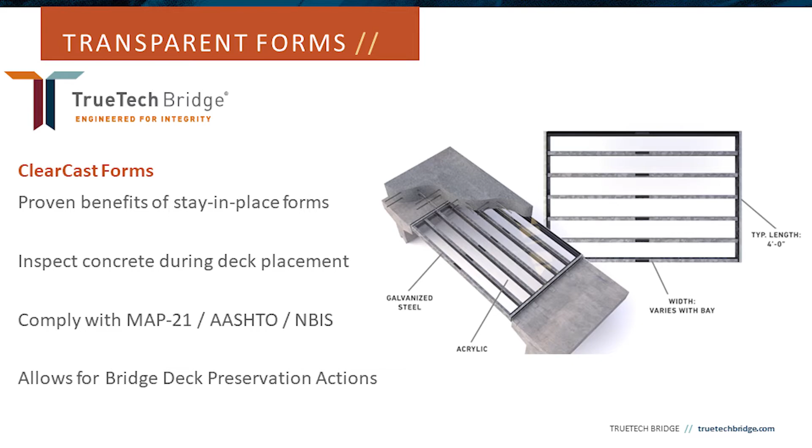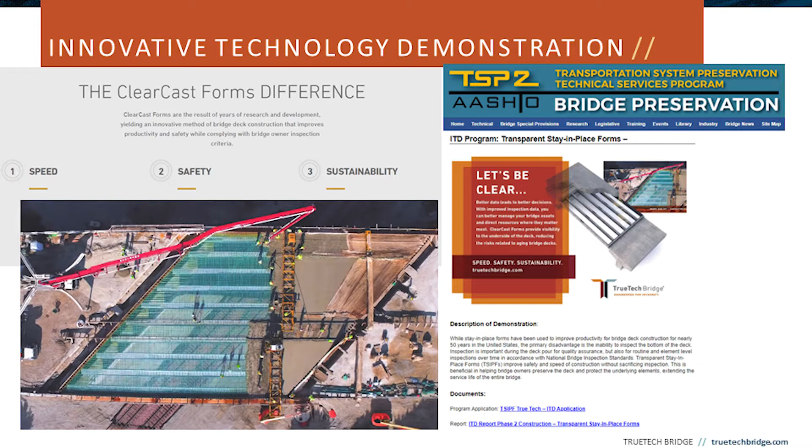And transparent forms were basically developed in response to 3 owner and contractor pain points. So they're always looking for a system that allows contractors to be more productive, to get their bridges built faster. Contractors and owners want a way to improve safety on their job sites. And they know that by reducing exposure to construction activities, they can be safer. Third, owners want to know the condition over time and then take the right action at the right time to preserve their bridge deck. So because of that, transparent forms were developed, and they've quickly gained traction across the United States because of those benefits.

So a little bit about our company, TrueTech Bridge. Contractors and bridge owners look to us to drastically save time, improve productivity, and then help them meet their bridge preservation goals. We're based out of Raleigh, North Carolina, and we're a design supply company of bridge products for the highway market. We currently supply 2 products. That's the ClearCast Forms, but also ClearCatch panels, which I'll review towards the end of the presentation.

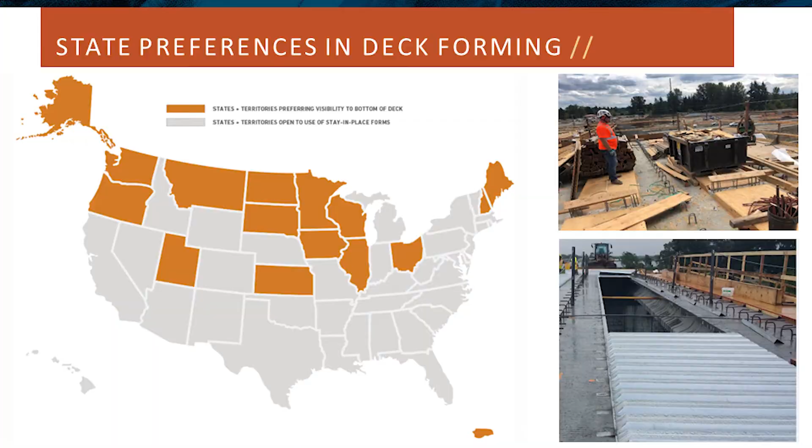So depending on where you're from, you probably know your state's stance on stay-in-place forms. Transparent forms meet a need for speed and safety in these orange states. Usually in those states, stay-in-place forms are prohibited. So we help contractors eliminate the time and risks involved in stripping forms over traffic, over railroads, other dangerous situations. In the gray states, transparent forms help improve preservation. And that's all through the ability to inspect the underside of the deck, helping those owners have more accurate condition ratings and the ability to make any small repairs before they become major risks.

So visibility is important because those routine inspections lead to the condition ratings. Following Glenn's presentation, that's important so they can take bridge preservation action and know the condition. The AASHTO National Bridge Deck Preservation Working Group states it pretty clearly in their resource guide, the importance of a bridge deck. It's like a roof that provides protection of those underlying elements from environmental conditions, which then correlates to extended service life of the entire bridge.

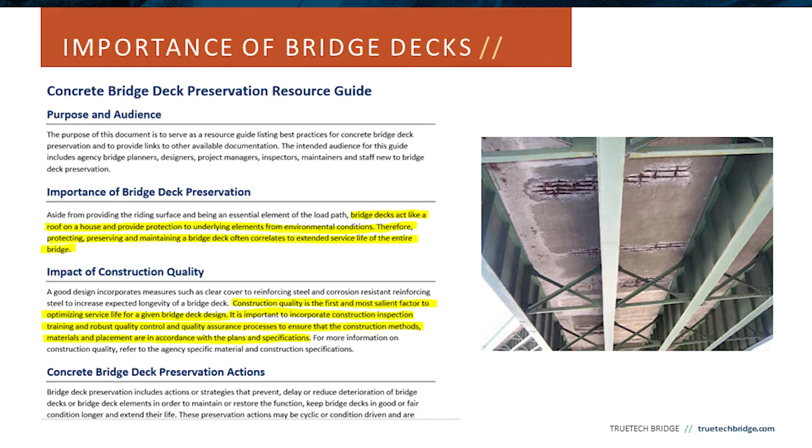They also go on to talk about the impact of construction quality, which they say is the first and most salient factor to optimizing service life for a given bridge deck design. So with stay-in-place metal, visibility to the underside of the deck is obstructed and cannot be inspected.

To take this a step further, once the deck overlay is done on the top of the deck, then neither surface of that deck can be seen, and this is something that has concerned inspectors and bridge owners across the country. So Indiana DOT had been using stay-in-place decking for over 40 years.

They'd recently been putting more of a focus on the value of inspections, and they're aware of some of the uncertainties they have in terms of the condition of their metal form bridge decks. Some within their department, I believe, wanted to prohibit stay-in-place forms going forward, but the construction group realized that there's some safety aspects of stripping forms over traffic and high heights, so they were looking for options.

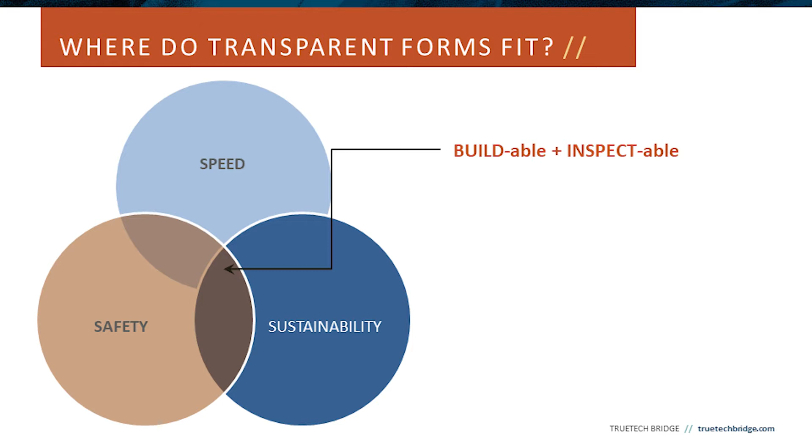And Indiana DOT is not alone. There's a lot of bridge owners that tell us they need a stay-in-place form that is both buildable and inspectable, so a form that meets the needs of the contractor and the owner.

So as Indiana was evaluating our transparent forms, around that time we were accepted into the ITD working group. So we partnered with INDOT's Jeremy Hunter as the sponsor and HNTB as a consultant to report on the use of transparent forms for a bridge deck in LaPorte, Indiana. So a few details of the project here.

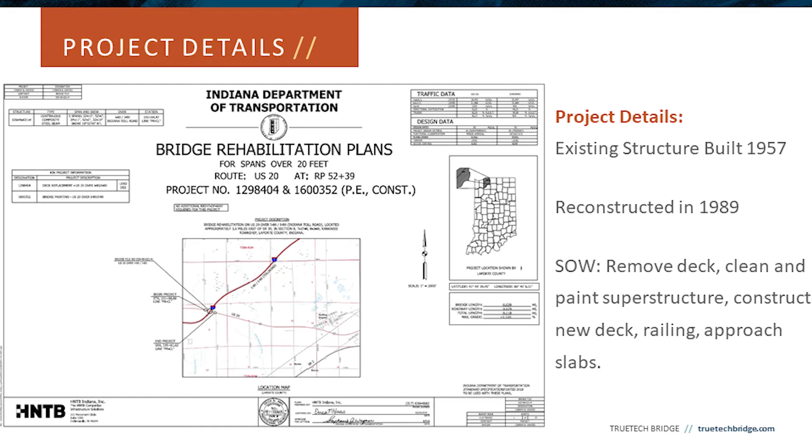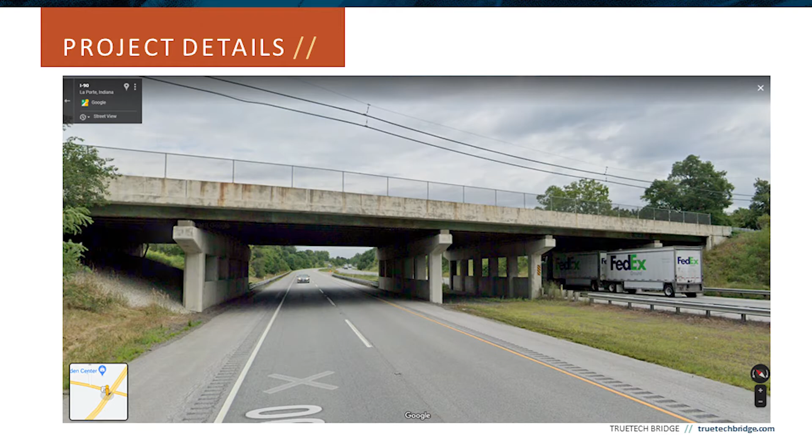The existing bridge was built in 1957. INDOT did a rehab in 1989, which was the first deck replacement. And then the project that we're working on was the second deck replacement just 31 years later. It's a 4-span continuous steel girder bridge. It's carrying US 20 over the Indiana Toll Road, which has about 28,000 vehicles per day.

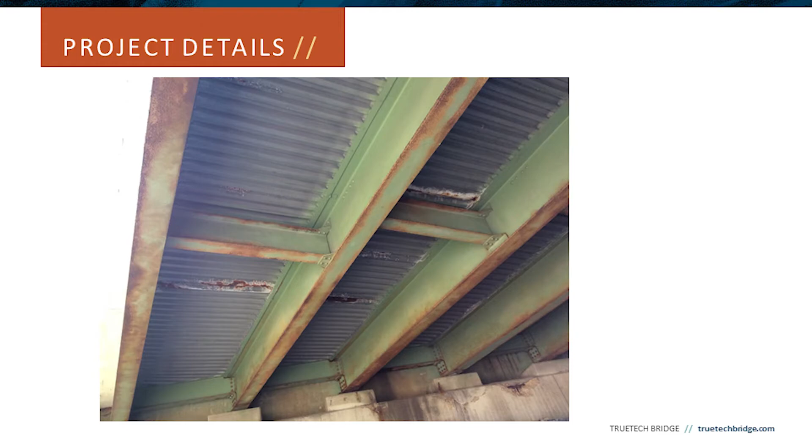So both the deck and the girders were showing signs of deterioration. You can see the rusting and the efflorescence of the metal pans here. And INDOT specified permanent transparent forms in the plans. The square footage of forms was around 14,000 square feet. Project bid back in 2019 for a low bid price of $2 million.

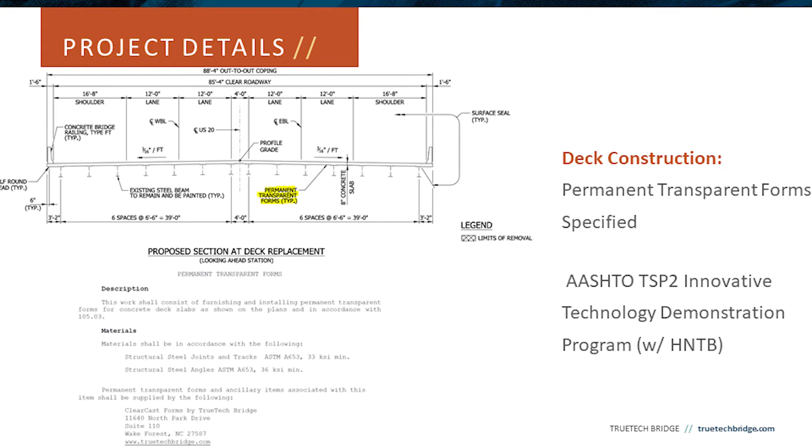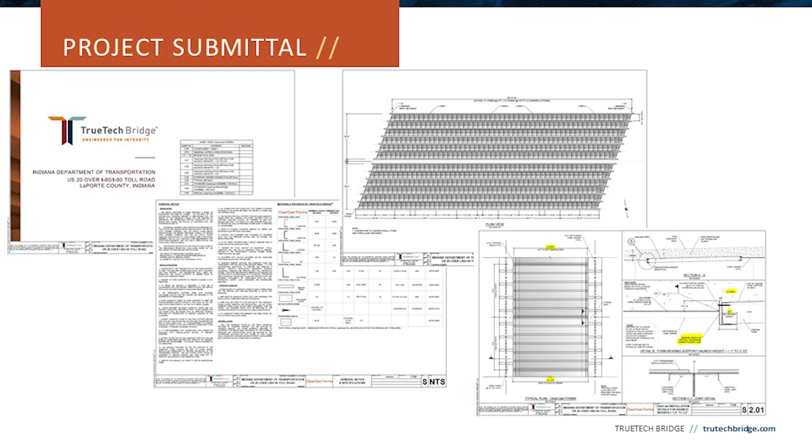So TrueTech Bridge, we provide both the design and the supply of this form system. We prepare all the shop drawings and calculations for every project, custom details for the contractor to do the installation properly. Just due to time constraints, I'm not going to go over those details, but just know that's one of the services we provide. So here's the installation of the first phase.

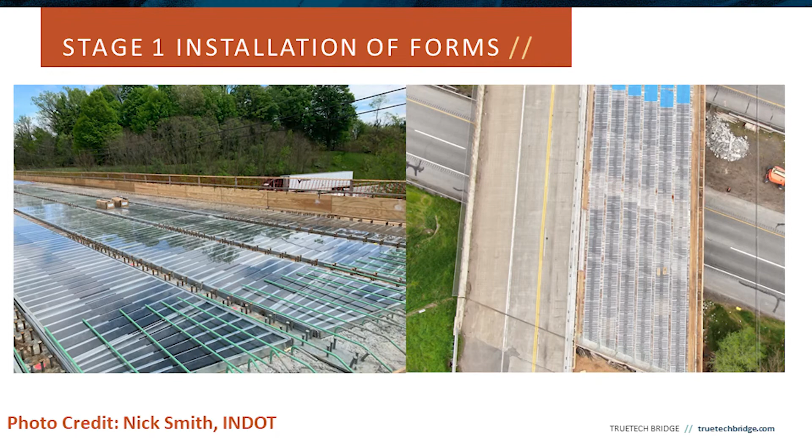This was a 2-phase project, and it went really well for it being the first time for this contractor in the state. Images here of the forms put in place just prior to rebar installation. And the welded support system is exactly the same as what's used for corrugated metal forms, so contractors are very familiar with that process. All the forms do come prefabricated and install very fast once those support components are in place. And you can see the skewed forms here at the abutments to match the existing bridge geometry.

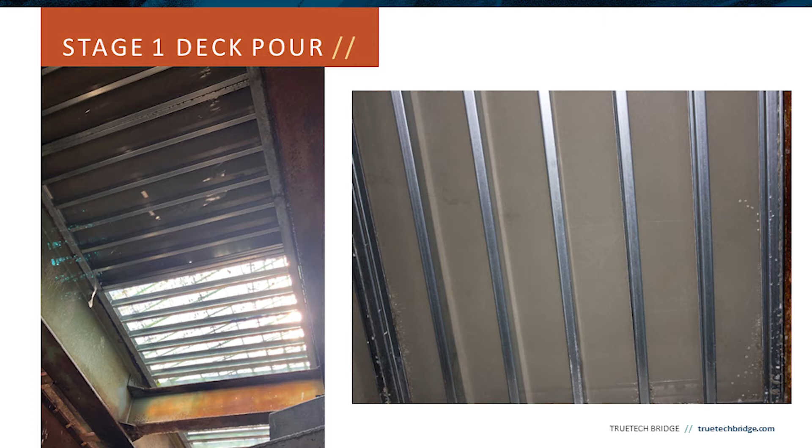So photos here during the deck pour below the deck. Owners tell us they like to see what's happening during the deck pour and confirm consolidation of the concrete, making sure they're getting what they're paying for.

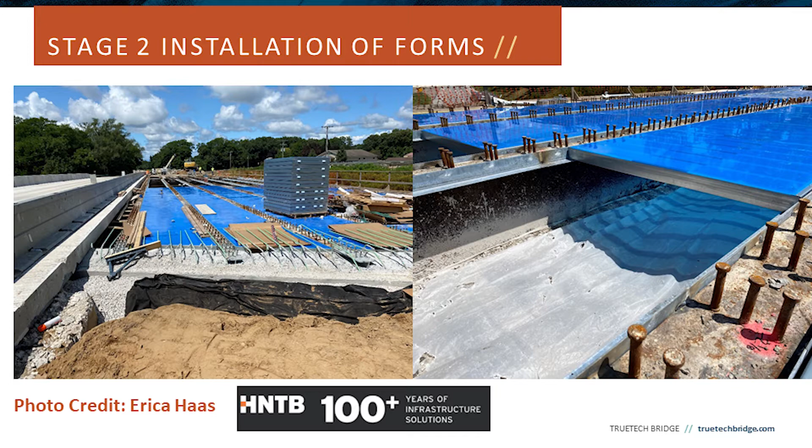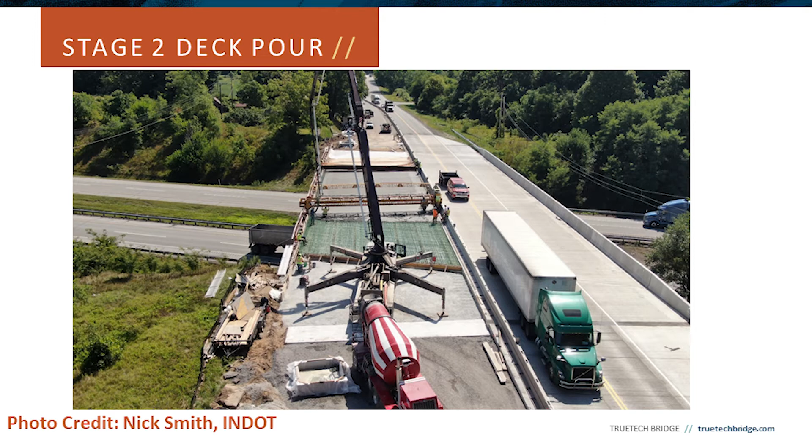Second stage installation here. You can see the pallet of forms sitting on the bridge. Each of these weigh about 65 pounds, which is easy for 2 people to pick up and handle and install them. The second stage went much faster than the first since they had a little bit of experience. See the second stage deck pour here, stage 1 on the right, stage 2 on the left.

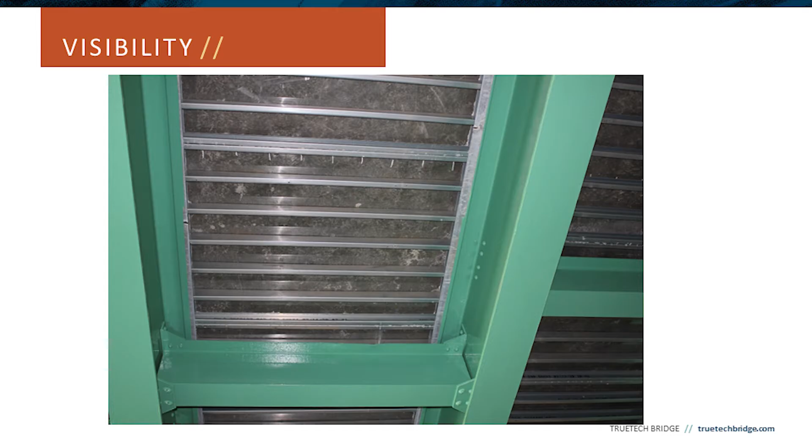And I think this photo is interesting. You can see where the rebar subcontractor marked these little white chalk lines on the forms just to show the spacing of that longitudinal reinforcing. So you can't see this on any other type of form system, and I think that could come in handy in the future to know where that rebar is located.

Photo at the stage line, so the deck on the left side of the girder was formed and stripped. The right side obviously has the transparent stay-in-place form, just for comparison. And then I've got some snippets here, might be difficult to read, but this is our latest ITD report.

The overall objective of this project was very simple. They broke it into 2 parts. Number 1 was the contractor's installation rate, similar to what they're used to for stay-in-place metal forms, and then did the deck forms handle the deck pour. And then number 2, they wanted to report on the visibility of the underside of the deck over at least 2 inspection cycles. This project has had the initial inspection.

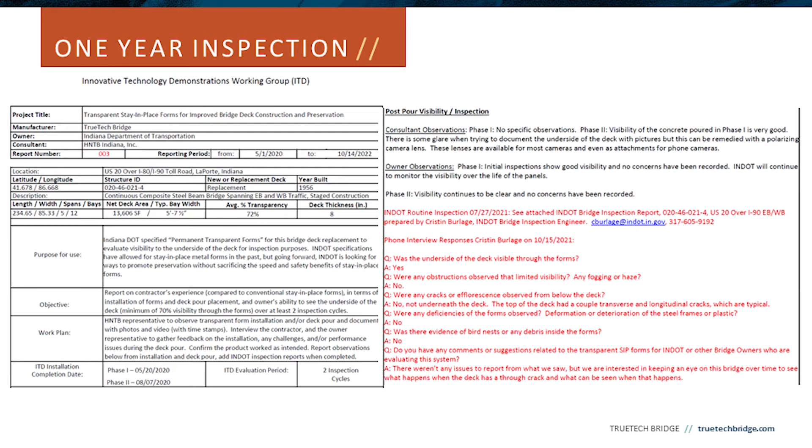We did an interview with the inspector. That's highlighted in red if you go check out the report. But basically, the owner, the consultant, all their observations were, visibility was good, no concerns. We'll continue to monitor. And that interview actually addressed a lot of the issues that typically come up about hazing, fogging, birds, none of which were an issue.

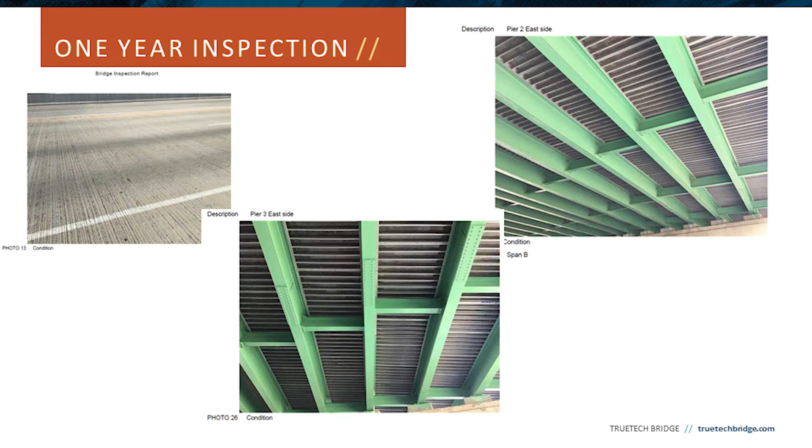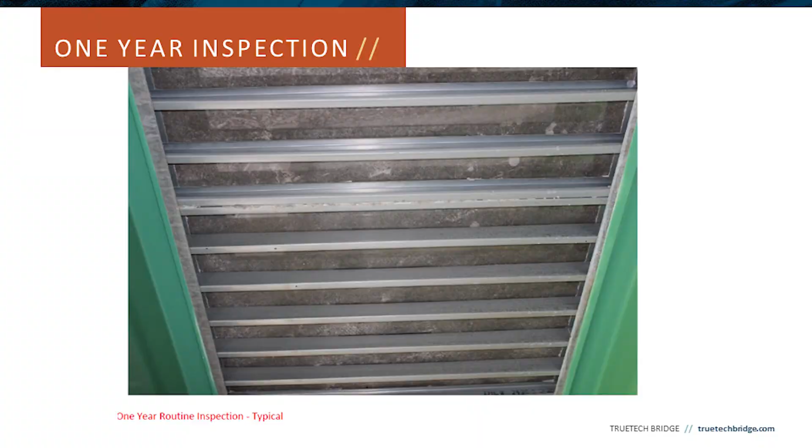A couple photos here of the bridge inspection report. The top surface of the deck already has a couple cracks. No cracks were noticed on the underside of the deck yet. The inspector was pleased with the visibility and the condition of the forms themselves. And the forms were clear just like they were during the initial installation.

Quick summary of the benefits to Indiana DOT. Their experience confirmed the productivity and the constructability that they were used to, and now they've gained that visibility to the underside of the deck. So transparent forms now help them with their condition ratings, reducing risk, and then extend the life of that deck through preservation actions. A few other benefits have come to light after talking with the asset management inspection team.

They've had some deck quality issues on some recent projects where they feel like transparent forms would have been a good fit. So they had some concrete honeycombing. They had to go back and replace the deck portion of it within just 1 or 2 years. So that's an issue of the upfront deck pour that they want to have more visibility for.

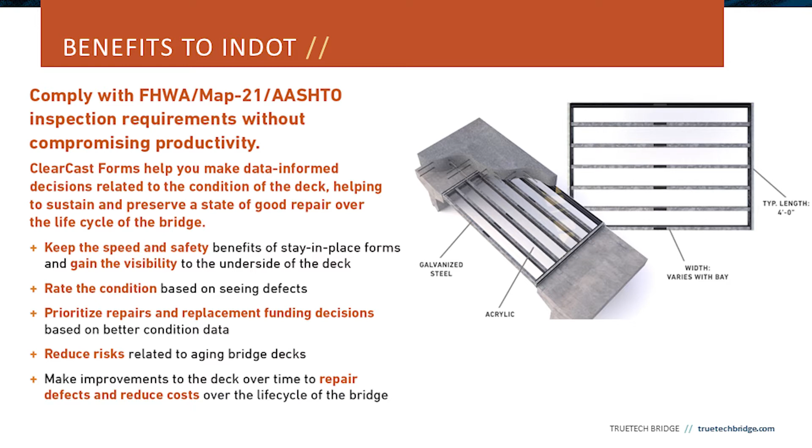Also, they've done some of these hydro demolition overlays. As they got into it 2 or 3 inches down, the underside of the deck was corroded. Those turned into full depth overlays, resulting in a change order, issues with traffic. It just kind of became a mess. So they're seeing this as a good option moving forward.

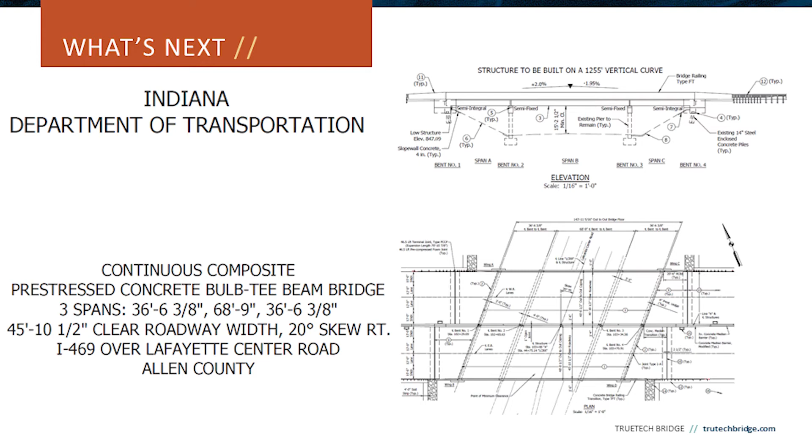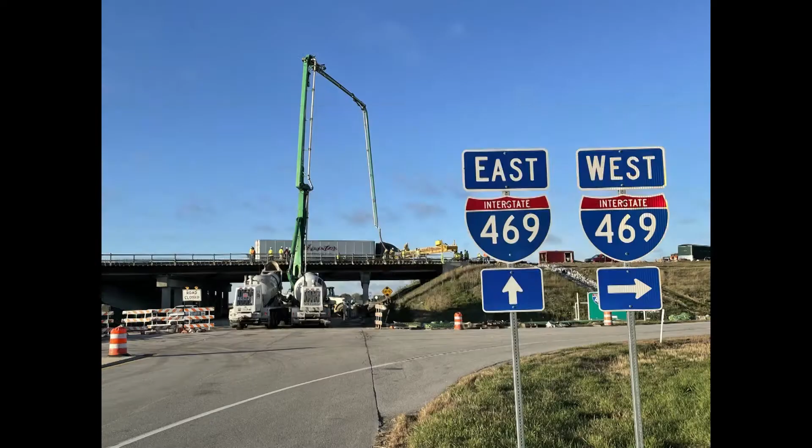So since they were pleased with that first project, they did a second project. That was a pre-stressed girder bridge. This time it's in Fort Wayne, Indiana. And the idea here is to get a second district and second contractor involved just to confirm what they saw in the first project. So here's a quick video showing how that project went. I'll spare you the music here.

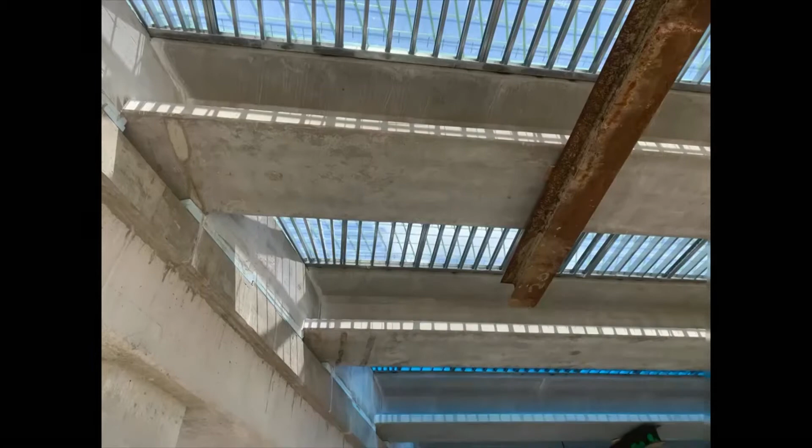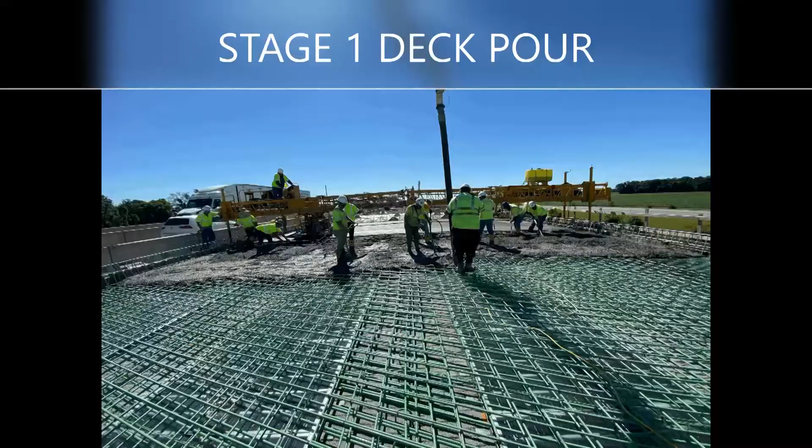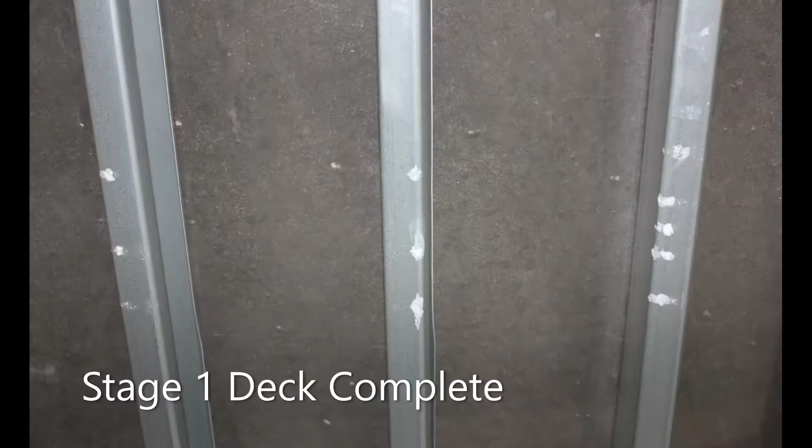So this was stage construction. It was only about 6,300 square feet, so half the size of the initial project that we did. The rebar subcontractor also did the deck installation for the project. They had a crew of 3, and it took them 2.5 days for each phase to install the deck forms. They really liked the system from an install perspective. And INDOT, again, liked the fact that they could see that concrete being placed and confirm concrete consolidation.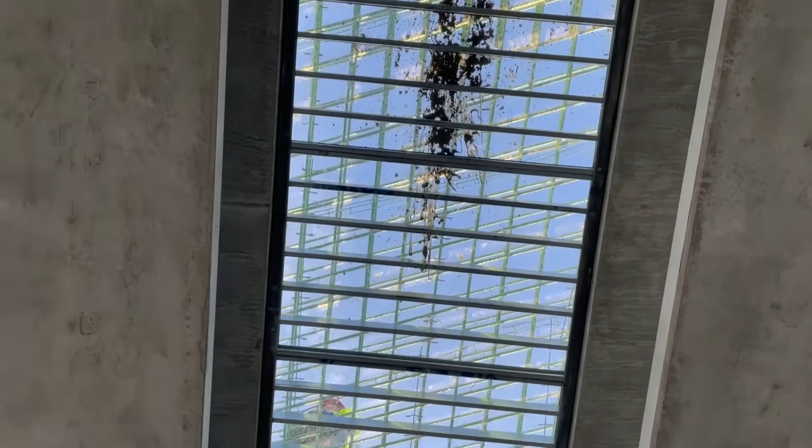INDOT's currently evaluating where transparent forms give them the most value. For example, bridges over mainline traffic, flyovers, major river crossings, anything that they can go back and inspect and preserve those decks so that they can push any major rehabs or deck replacements into the future.

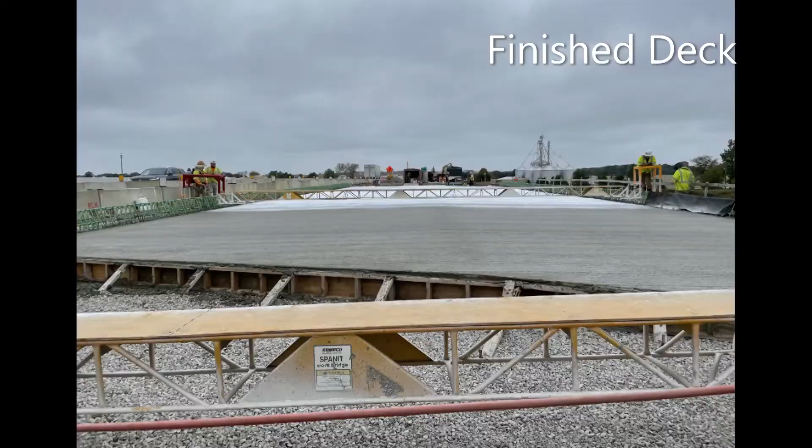So I did ask INDOT's asset management engineer to get me a quote, and he just sent me an email before the presentation, so I'm just going to read that out loud. These are his words. I know it's probably better than hearing me the whole time, but so here's his statement.

When I heard about clear forms, I couldn't wait to try them. The stay-in-place metal forms work well, but do not allow inspection to see present or future deck cracking or seepage. To be able to see the bottom of the deck as it ages is of invaluable assistance. No more inspection guessing or waiting for rust to form. An added benefit, which I had not counted on, was being able to see the bottom of the deck during and after the pour.

To see that the concrete is mixed well, that there is no segregation of aggregate to the bottom of the forms, but a nice slick finish is amazing to see and gives credibility to the assumptions we make of the concrete placement. I'm hoping to be able to use these on all of my deck pours in the future. So great quote from the asset management team at INDOT. It was great working with them.

So because bridge owners are recognizing these benefits of speed and preservation, we've been getting some momentum with this ClearCast product. The first installation was in Iowa back in 2017. We've since been installed in Minnesota, Oklahoma, Illinois, Washington, obviously Indiana. Future project installations in the next couple of years in Missouri, New York, Kansas, Ohio, Virginia, and Caltrans. Recently approved by Pennsylvania DOT, and we're now included on the approved bridge products list.

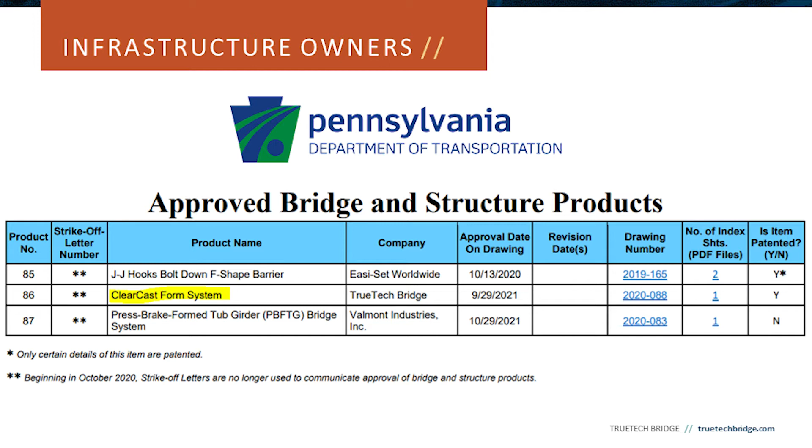We're looking for a demonstration project now, but we've also been instructed to meet with a shortlisted group of contractors for PennDOT's P3 Major Bridges project. The value there is the contractor that gets that job has to build and maintain it for 35 years. So using a transparent system like that will give them the credibility they're turning it over in the right condition, not having to go back and redo a deck after 35 years. So that kind of concludes the transparent form portion of the presentation.

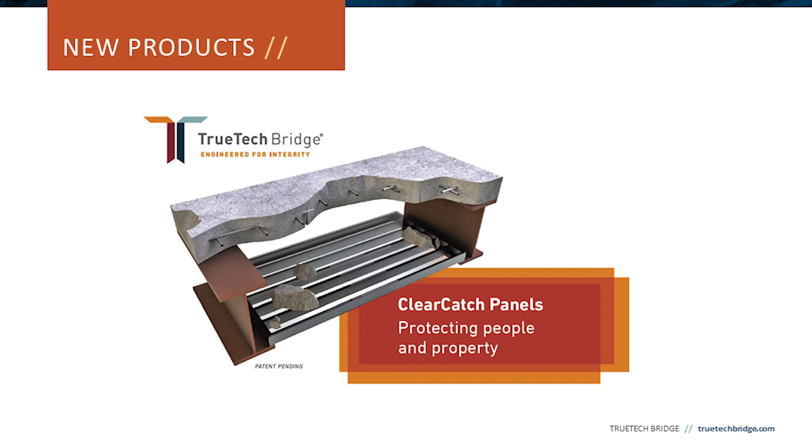I thought it'd be good to provide a brief overview of a new product that's been developed as a result of talking with other DOTs on their bridge deck preservation efforts and some of the challenges they're facing. So we discovered we can make some minor adjustments to our panel system to work as subdecking or protective shield beneath existing bridge decks that are in poor condition and failing. So a lot of states use false decking underneath existing bridges because of the safety concern with poor condition decks. They have to remain in service until they get replaced.

So when bridge decks start to crumble, it's usually something that makes the news because of the damage it could make to the car. Obviously, there's a concern for injuries to people. So the current materials that are used for subdecking are basically lumber, and Michigan DOT uses metal mesh panels. You can see some of the pros and cons listed here for each. Obviously lumber, if you're an inspector, it's restricting the visibility to the deck. You're in a dark, confined space. Over time, if that's there for too long, that wood starts to rot and people can step through it, we've heard.

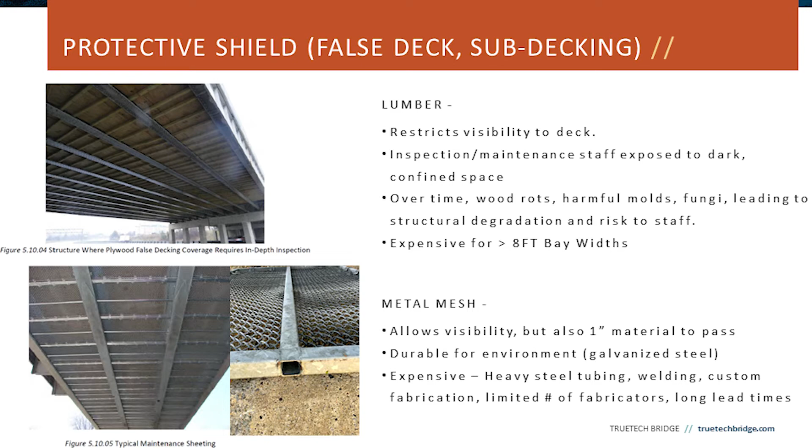For metal mesh, it's been a good solution for Michigan to date. It allows visibility so they can do that inspecting from below. The issue is that it does allow for 1-inch material or less to fall through. So it's still an issue of stuff falling onto traffic or people. So they like the transparent feature of the metal mesh. Finding these is difficult. It's an expensive product, and they're looking for an alternative. So here's an example of the metal mesh panels doing their job, catching a delaminated bridge deck somewhere in Michigan, hopefully where you've never driven.

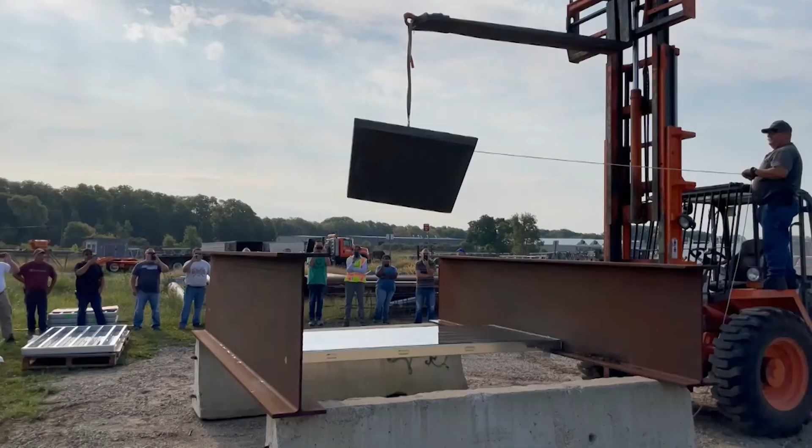For situations like this, INDOT developed a drop test to ensure the safety of these types of panels. So if you know Jason DeRuver, he likes to break things. And basically they have a load test set up where they look at their inventory of bridges. They go up to about a 9-foot girder spacing. They have basically a 5-foot drop from the bottom of the deck to the top of the panel. And what they want to test is, can a system catch this without letting that panel fall through?

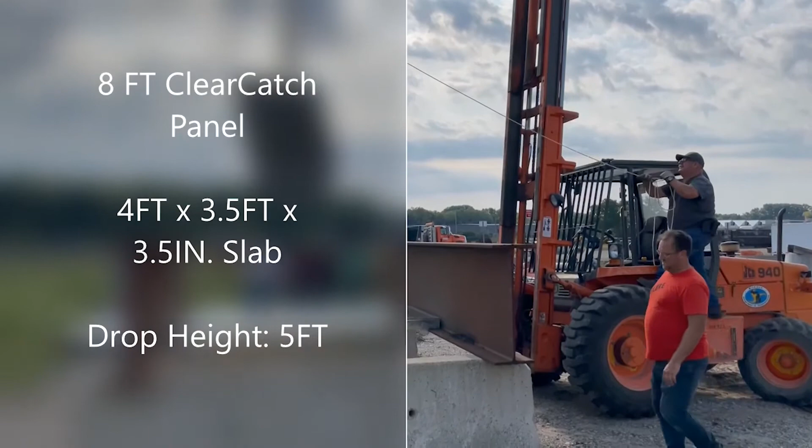And for our system, they wanted to make sure that they could not break this polycarbonate sheet. And so this was the 9-foot span that you just saw. This was an 8-foot. This is roughly 700 pounds rotated in both directions, falling on the worst point load on top of the plastic between the steel joists, and the panel performed better than expected.

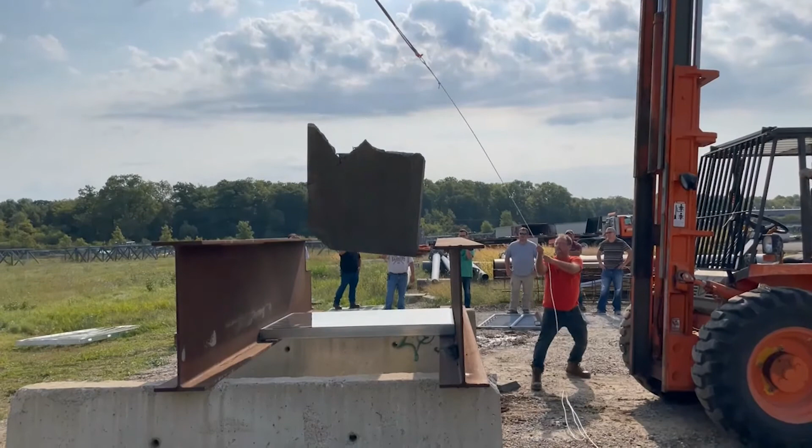So currently this system is about $10 a square foot cheaper than their metal mesh panels, and goes up fast. It's reusable, so they can take it down and store it. They can put it on different bridges across the state as needed. And we tested a smaller 5.5-foot span. We can use a little bit less steel gauge and a thinner piece of plastic at that level. So it's a little bit more economical for those. But fun test, don't recommend doing that at home.

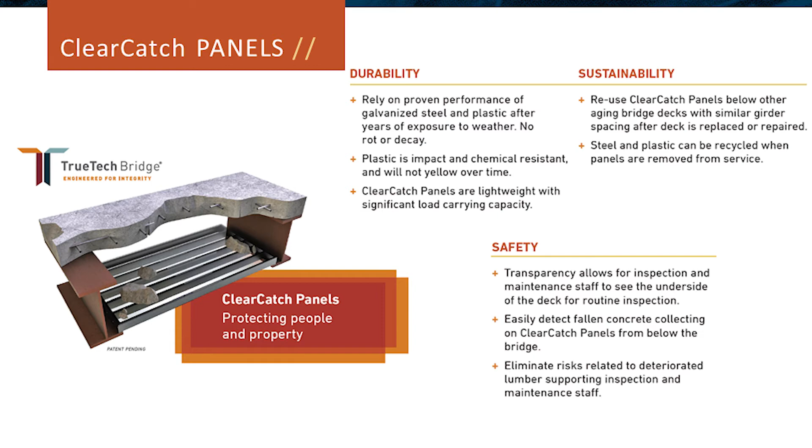The last slide here, we've been fortunate to have repeat projects with the Indiana DOT, and we have more projects coming up with states that are specifying transparent forms to help them meet their asset management goals in the future. And this success can be attributed to this ITD program, which helps facilitate these relationships. And this community has been great to work with.

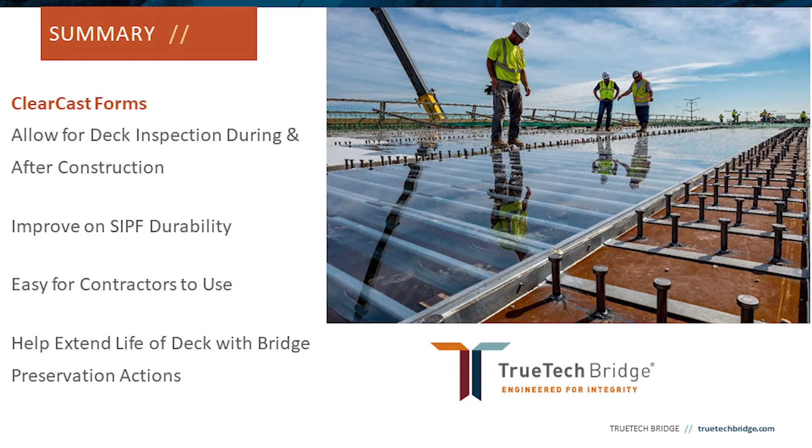I had a couple of questions, actually. First question was, why would bird nesting be a problem for this as compared to anything else? They aren't. They're just a perceived concern. That's been asked by DOTs. Why would you perceive that? I didn't. Other states have brought that up. I don't understand that at all.

The two other questions was, these will still sort of hold water. So do you think over years, sometime 15 years from now, we're going to have maintenance crews drilling holes in it to let the water out? That's the second question. The third question is more serious than that one, which is, do you have any issue with the traction on this when the workers are laying rebar? It wouldn't seem like it would be a really OSHA-approved sort of friction level on that. I just wondered if that's something you can... No, so the first question... I don't know anything about it, but I just wanted to ask.

Yep, the first question, we get that a lot. So once that deck, you get a through crack and moisture starts penetrating, you get moisture. You see it, you can go up and drill through this plastic. It's less than a 1/4 inch thick. So you can cut it out, drill a hole. It's acrylic sheet for the deck form, but yeah, it's easy to take out and change. Also, contractors are used to taking the entire form out if they have to, so you can get full access.

Second question, that was about the slick surface. So there is a masking on the panels that is left in place until right before rebar. And so that is a fine surface, it's not slippery. If it gets wet, it can be slick, but we hear it's nothing worse than walking on oiled down formwork. We haven't had an issue with it. We just tell people to take care like they would on any other surface, and it hasn't been an issue.